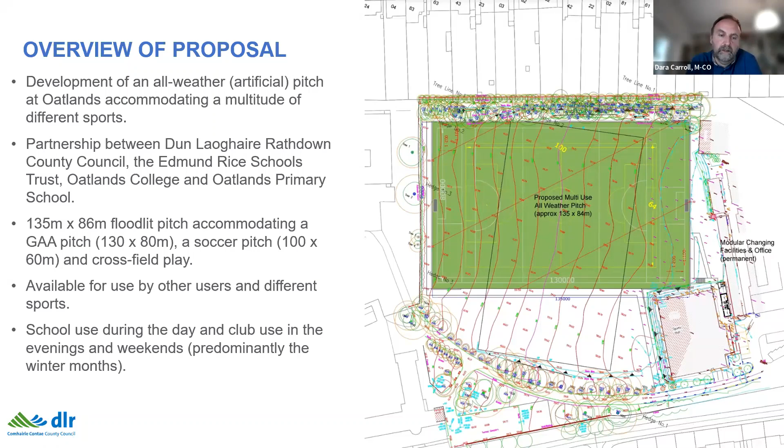The site plan in this drawing here. So the pitch will run at 90 degrees to the current pitch arrangement. So what we have at the top of that picture there is Trees Road Lower. To your right, it's the Stillorgan Road, the old Dublin Road entrance to the school. At the bottom is Woodlands, and to your left is Cherry Garth. So the pitch, the new pitch, will be turned at right angles to the current playing pitch at Oatlands College.

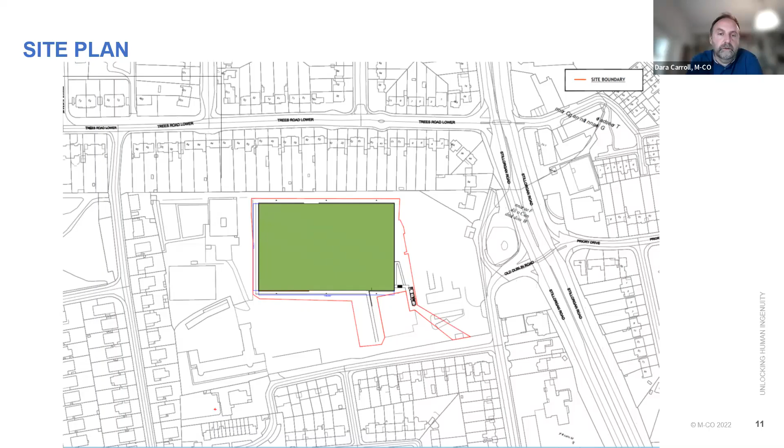I have a series of elevations here. They're quite hard to read in this format. We will be having larger versions of these in the public display. They're available online as well, that people can go into the drawings on the Citizen Space website and look at the detail of these. So the elevations of what it looks like from the side, from the pitch side and either end of the pitch.

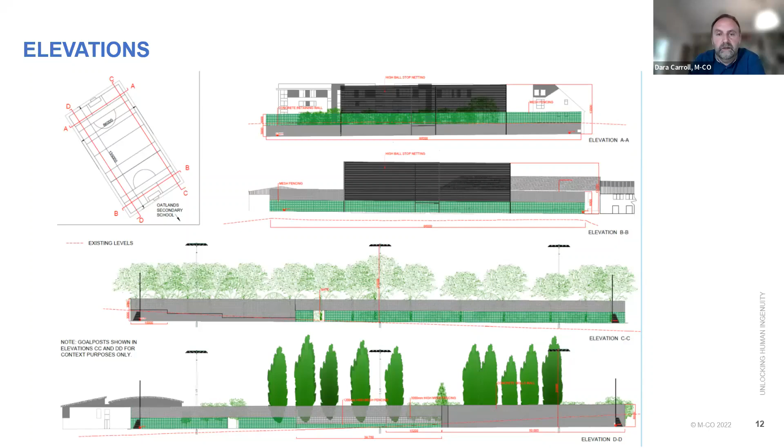It was raised in the recent consultation in March that sometimes people find it difficult to read plans and elevations. They can be quite technical and hard to understand. So since that, what Dún Laoghaire-Rathdown County Council have done is they commissioned a series of 3D computer-generated visualizations of the project to help people understand what this project looks like. So I have a couple of these here.

So this is the view of the proposed all-weather pitch, and we are looking here from Oatlands College at the bottom of the picture there, the Oatlands College Secondary School. To the left, the green roofed building there is the current sports hall for Oatlands College, and the top of the picture there is Cherry Garth, Trees Road Lower on your right, and then over to the left and top is the primary school, and further to the left would be Woodlands Avenue. So that's a view looking up the pitch.

You'll see from that view that the pitch is raised a couple of meters down the school end, because there is a significant slope across the site. So the pitch is actually excavated down at the Cherrygarth end, and then raised up just over 2 meters at the Oatlands College end. So it elevates the pitch in order to have a flat surface across the pitch.

You'll see in the picture again the markings for the GAA surface, and also the soccer pitch in the middle of that. Also visible in these visualizations are the proposed floodlights, 3 on each side, that will illuminate the pitch in the evening time.

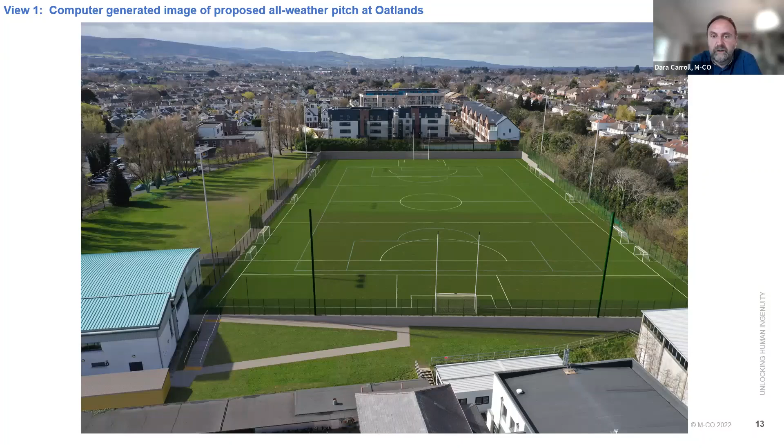A second view we have is more from the Woodlands Avenue side, an oblique view there of the pitch, showing the layout there from that view, and just indicating the trees along the bottom there retained, and there's no change along there. The road you see there is the internal road within the school grounds, and that will be used for drop-offs and collections for people dropping off, particularly children, when it's being used outside of school hours.

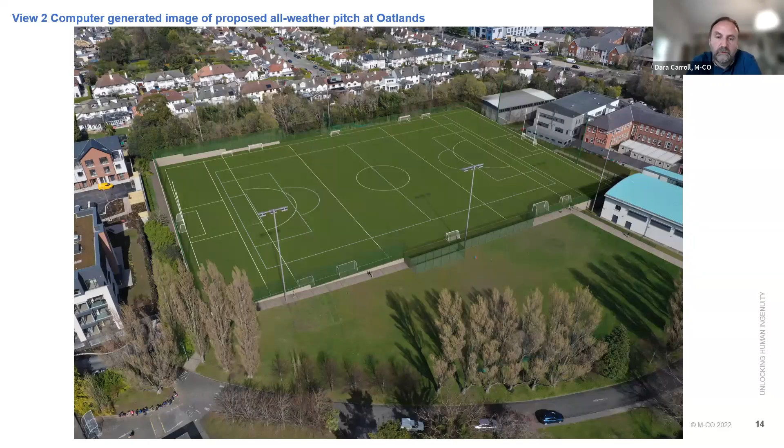So the second part is to raise some of the key issues that arose during the initial consultation with people, and in the preparation of the Part 8 design. So in summary, the key issues raised in engagement included traffic management, particularly in relation to access via Woodlands Avenue and impacts on Woodlands Drive and Bowfield Manor. Also raised was the potential light spill from floodlights, noise generation. People were also asking questions about impacts to flora and fauna, and what happens during the construction phase.

So since the initial meeting in October, where some of these issues and concerns were raised by people, a traffic and parking assessment was commissioned by Dún Laoghaire-Rathdown by traffic consultants Traffico, to try and address some of the concerns, risks and mitigations in relation to traffic and parking that might result from this scheme.

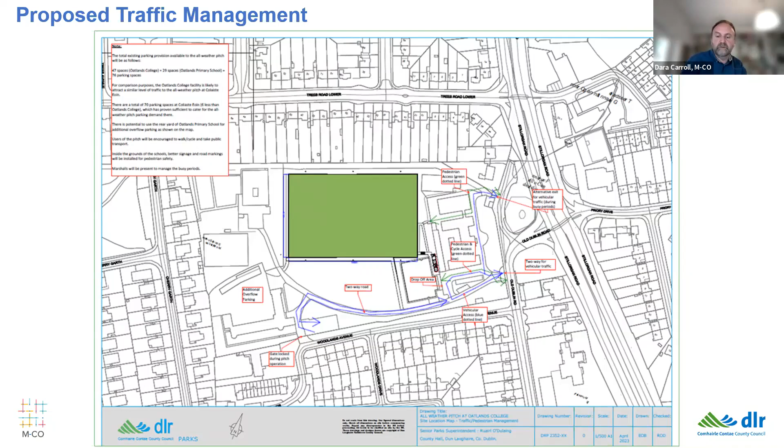Pitch floodlighting was the other key part of this project that people had queries about. So what's proposed are the use of 21-meter high lights to minimize spill. The lights at Coláiste Eoin down the road, for example, are 18 meters tall. It might seem counterintuitive, but the taller the lights are, the less light spill there is, because you can get more direction from the lights that are taller. So these lights will have even less spill than the ones at Coláiste Eoin.

LED lights now are highly efficient in terms of energy, but the technology now has moved on considerably, with the ability to direct the light towards the field of play and minimizing any spill on the surrounding areas. So technology has moved on a huge amount in this way.

The system will provide for a 500 and 250 lux lighting system, which will be suitable for GAA, soccer, rugby. 500, the higher lighting, might be used for hurling, for example, but generally it would be more likely the 250 lux lighting, which is appropriate for football.

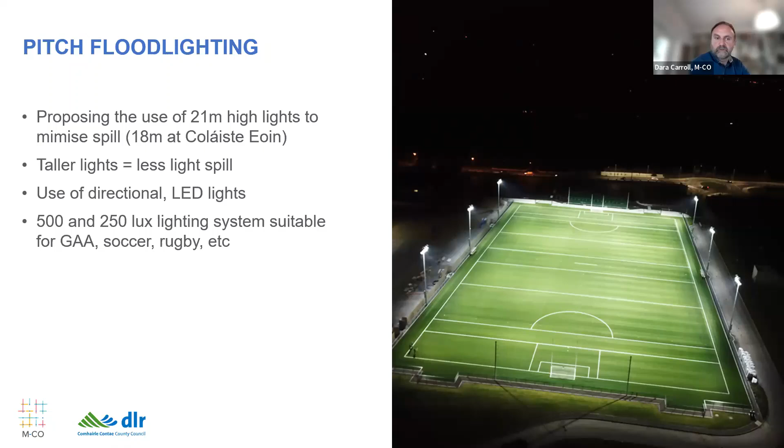It's very difficult to create a render of what the lighting would look like, unlike the daytime visualizations that you saw there. So what we've included here are some pictures of equivalent floodlighting in projects in Ireland. This is not too far away in Beckett Park in Cherrywood. It's a floodlit facility with similar lighting. And so that's an actual photo of that.

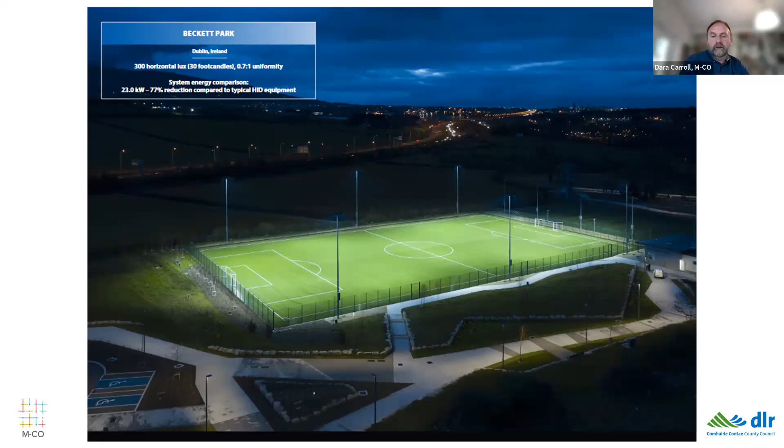And then at a slightly lower angle, and this was a question raised by residents, is it possible to get photos of a slightly lower angle, what it might look like from houses or adjoining areas. So this is a project in Beckett Park, again, similar lighting system. It's a bigger facility, but similar lighting. And just again, indicating how the light is directed on the field of play and there is little light spill surrounding the pitch.

The full lighting report, which is available in the Part 8 documentation, I'm not going to go through it all here, highlights the lux levels. These are the light levels that would be arising from the lighting on the pitches here. So this shows the extent of increased lighting surrounding the pitch. This has been refined since the last meeting with residents in March: the lighting design has been adjusted and further directional technologies incorporated to actually reduce the impact of light spill. And this drawing here shows that.

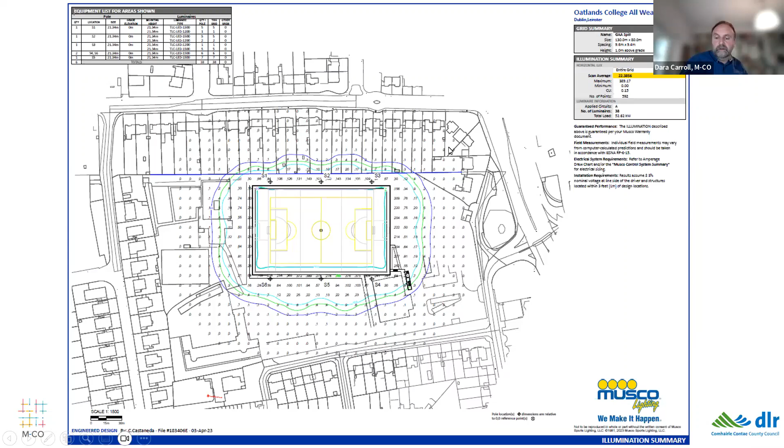Other questions that people had were related to flora and fauna. So in terms of wildlife, the fauna, a variety of field surveys were undertaken for the site, and a comprehensive ecological impact assessment was produced from this. And this report concluded that both construction and operation mitigates any potential impacts on the terrestrial, mammalian, avian, and aquatic sensitive receptors. So mammals, birds, aquatic creatures,

through various standard construction and operational phase controls. So how this will be built and how it will operate. The conclusion is basically that there's no significant impacts on biodiversity as a result of this. And this report and the field surveys within it are included in the Part 8 documentation.

In terms of flora and particularly the trees, it is a fact that a number of trees in the northwest corner of the proposed pitch would be removed to enable construction of the pitch, and a comprehensive study is included again as part of the Part 8 documentation. But again, in response to residents' queries, the number of trees is minimized by proposed construction methodologies recommended by the tree specialist, the arborist.

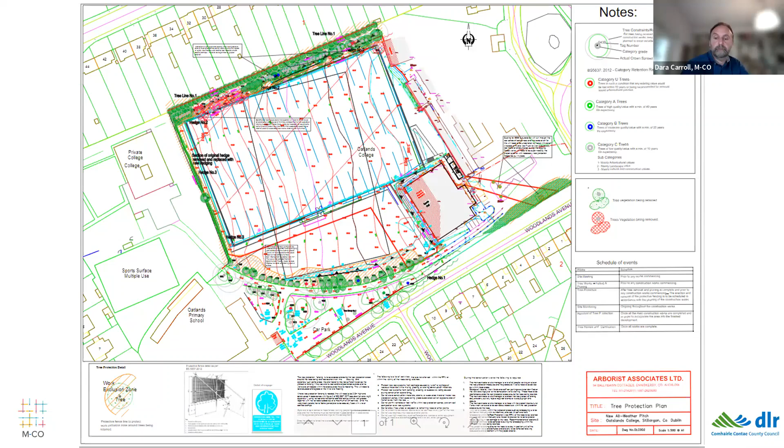So I'd like to hand over to Richie, if you'd like to maybe collate some of the questions, queries that have come in during the presentation, and you might put them to myself and Owen. As I said, Owen from Parks Department will probably answer a good number of these questions. So Richie, hey there. Yep, I'll come in now with some questions.

So yeah, there are a couple of questions from different people about the suitability of the pitch to play rugby, as it's one of the sports of the school, and also adding to that, if rugby is in the scope, will the pitch undergo rugby turf specification testing post installation? So that's about the pitch being used for rugby.